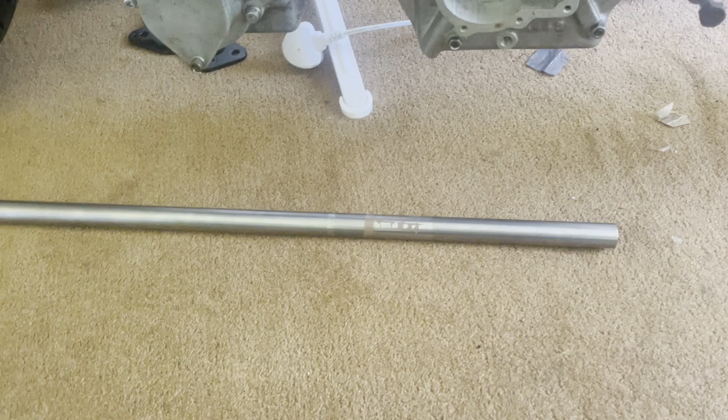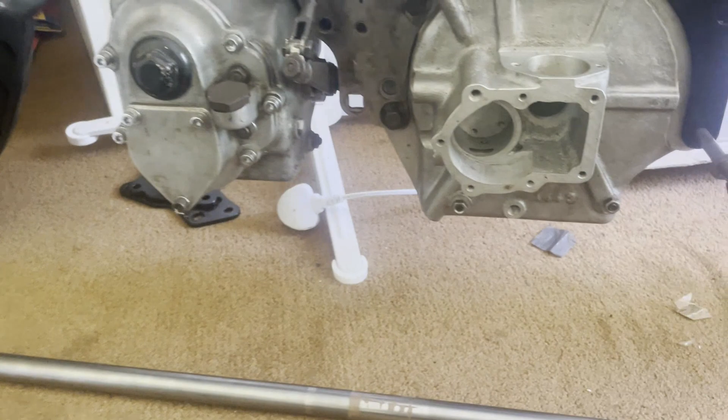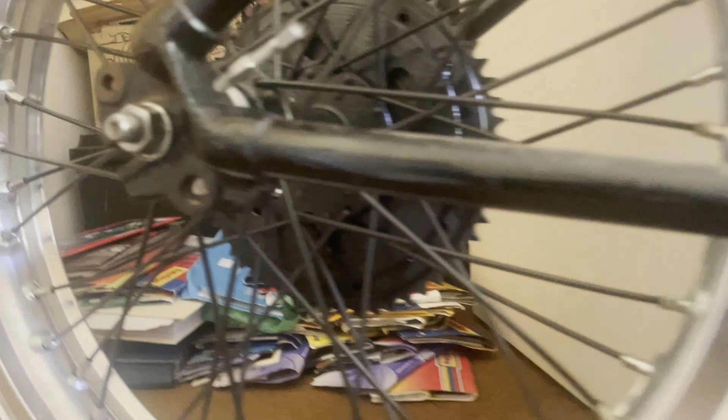So the next part of the project is this steel bar. I've got two of them, but I'm just showing one in the picture. What I'm planning on doing, like a few other people have done, is use this bolt and this bolt to join that up to that fixing, and then brace somewhere between the two.

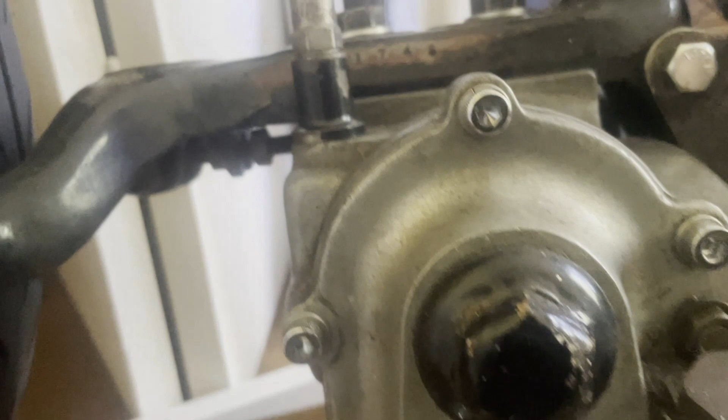So we're going to do something like that with a bend somewhere near the gearbox, and then it's going to come straight and underneath. I'm going to have a go at flattening this tube out so I can drill some holes through it, probably put some lightening holes in. Ultimately these two are at different heights out of the engine, so I'm going to make some spacers so it sits parallel.

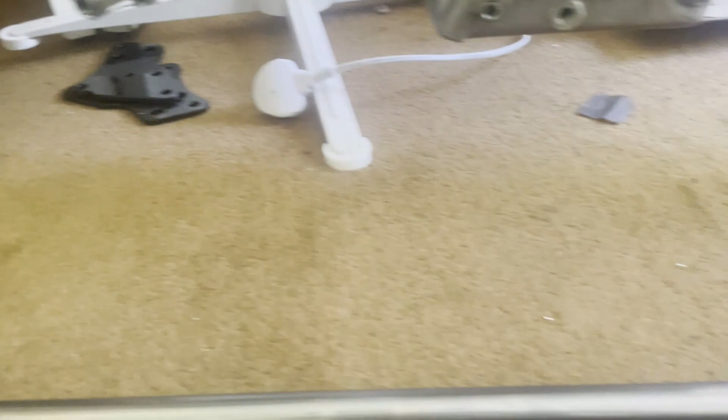And probably maybe put some threaded inserts in as well. But that's the next project. Hopefully this is the last time you're going to see that bit of tube straight and completely round. Let's see how we get on.

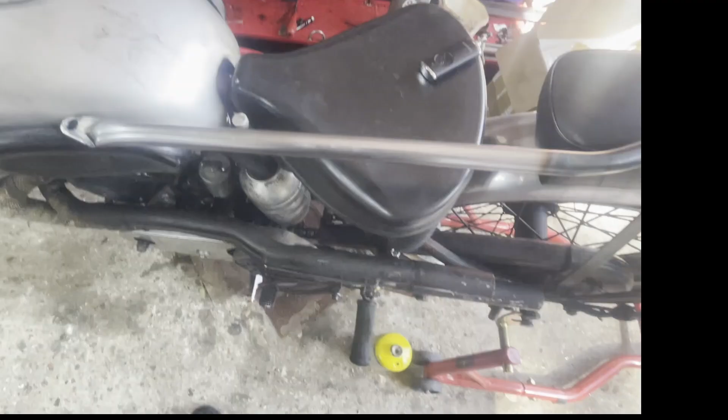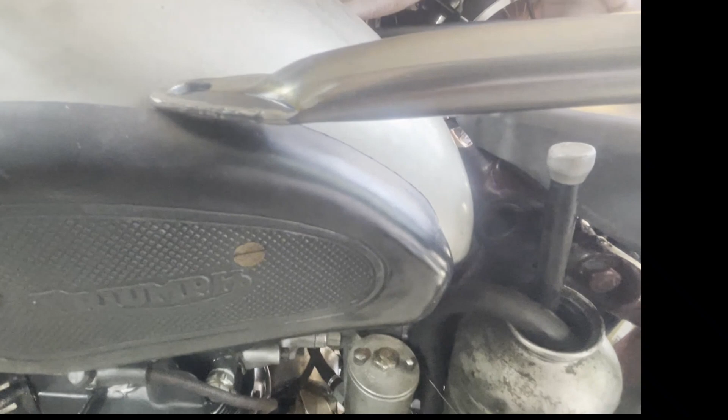So what I've done so far is squash the end of that tube, drilled a hole in it, and then welded it so it's all joined together.

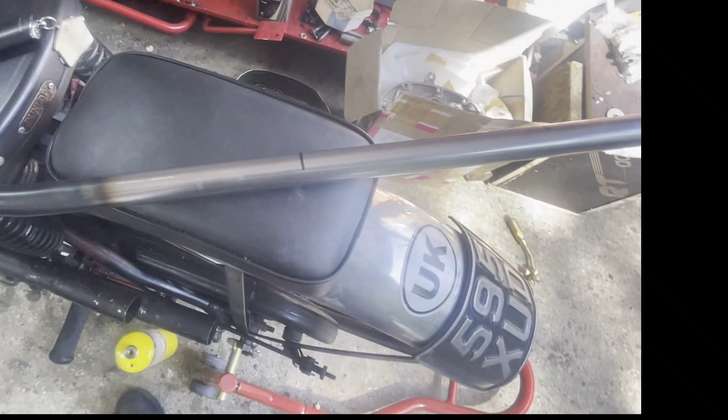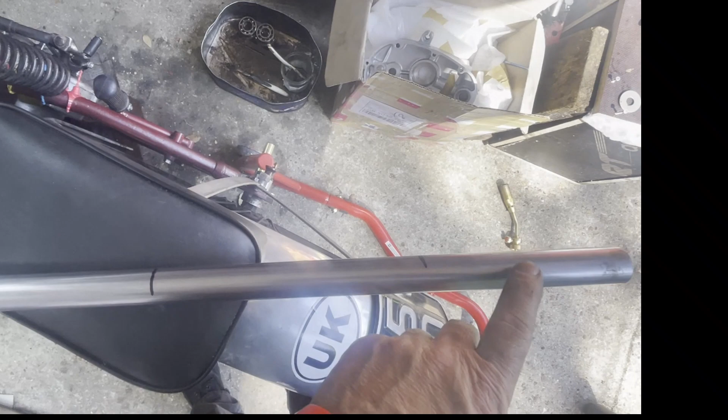I've put a bend which is going underneath the gearbox, if you can remember that bit. I've marked out from there to there, which is going to need to be flattened, and this bit at the end I don't need, so I'm not going to flatten that, I'm going to chop it off.

For this bit I managed to use a friend's hydraulic press, and we used something I'd made previously when I was an apprentice, which I'll show you in a bit, as a way of creating a bit of a radius edge on that. Sorry if you're all getting sick of looking at that.

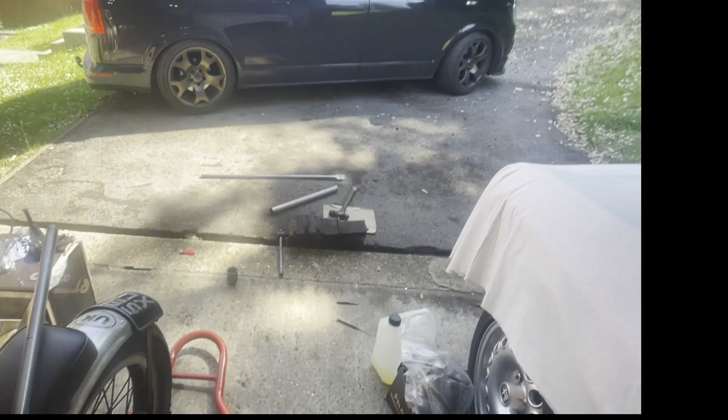I'm now going to mark the end of the other tube out and drill that hole in to get them the same, and then I'll be able to use this one that's made as a pattern to bend the one that's still straight over there at the moment.

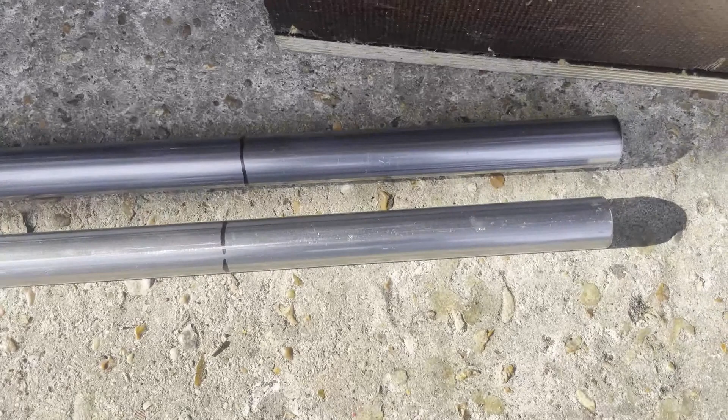Unfortunately I forgot to press the record button when I was bending it. One is a little bit better bent than the other one, I don't know how well you can see that - a bit of a flat in the middle, but effectively two frames bent up. And then the markup is where I need to flatten off that section.

And then we've got another couple of bits and bobs to do, and we'll have made some lower frame stays. There's a few more jobs to do on this particular part of the project, and hopefully it's really coming together.

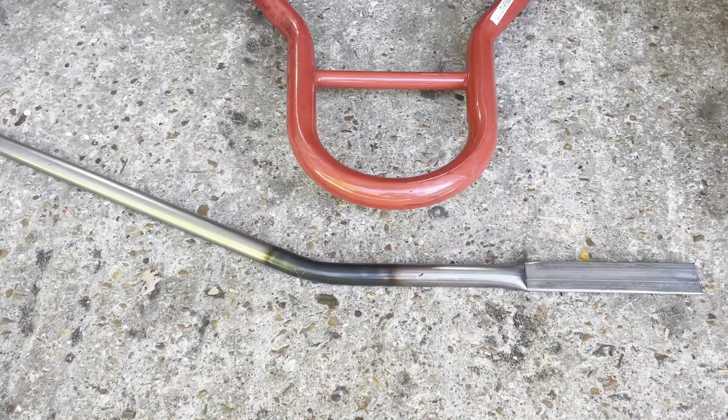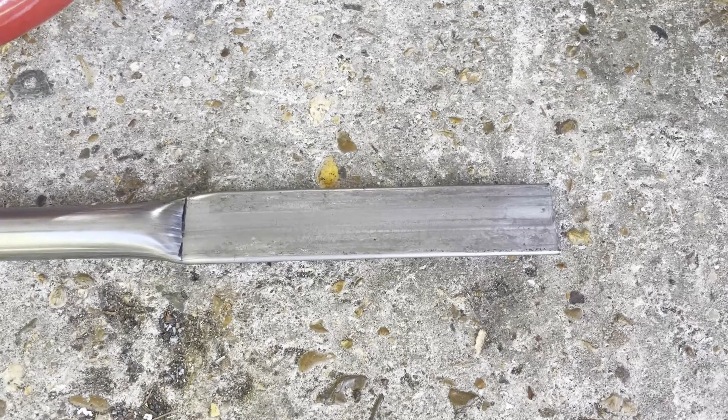Right, so we're back on the Velocette project, and I think I might have promised to show you what I was doing in the way of squashing the end of the tube, but I've failed miserably in that. Basically I used a hydraulic press and some big bits of metal, one below, one above, and I managed to squash that down nice and flat.

So what I've got to do is put a radius on the end. I need to mount it to the bike, fixing it with the bolt hole that's through there, and then I need to make up something so I can push it through the crankcases and mark a hole on either side, because the holes aren't even about that flat section - one's upper and one's lower, and I need to get them exactly right.

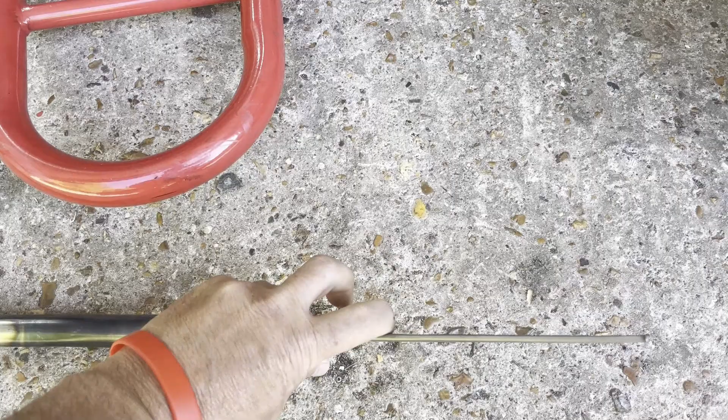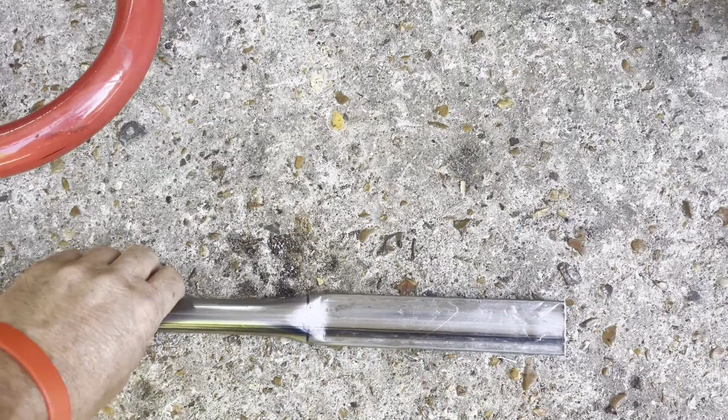So I'm going to go and do that off camera, and then I'll bring you back and I'll cut round the end together. We'll drill some holes, and then effectively I'm going to be making some sleeves which are going to go in here - if you can imagine, the crankcase is sat against that face, and you sleeve this side of the bolt on this side of the hole, to space that off the engine. There's also a countersink or a counter bore on the engine crankcase, so it needs to be like a step top hat, and then I'll decide whether I'm going to weld it to that frame.

Anyway, we're progressing, we're getting there slowly. Let's go mark some holes out and I'll come back.

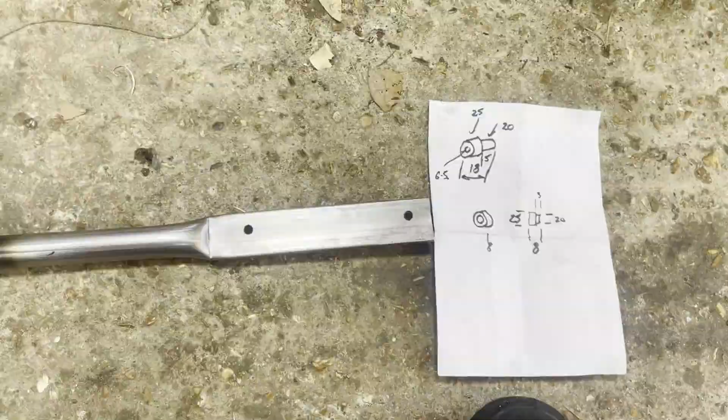Right, so drill the holes. The bolt holes we're using are only 1/4 inch through the crankcase, so that's as big as they're going to get, so it's not going to be the strongest thing in the world.

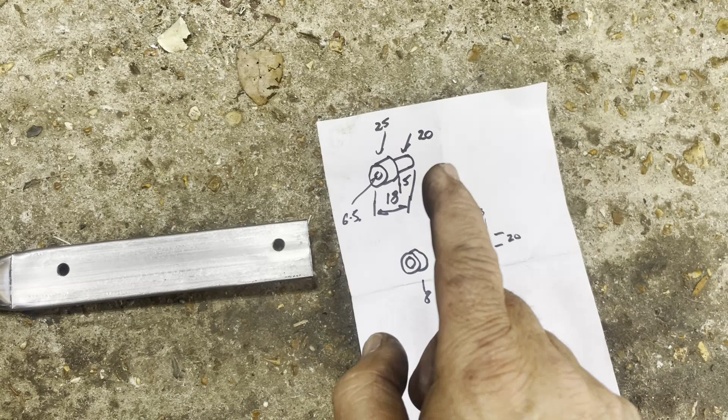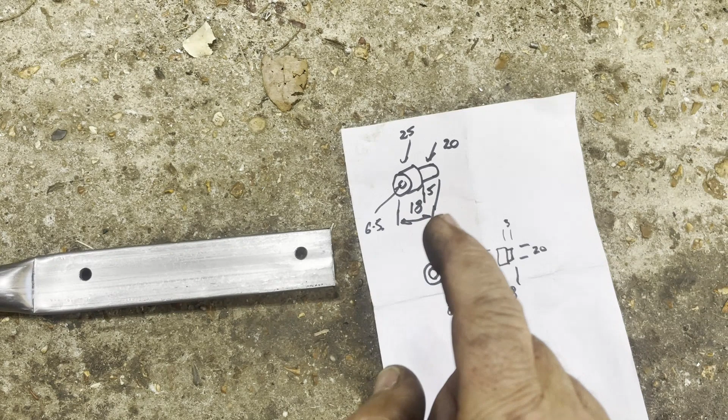But I've measured it up, and I made some very, very rudimentary drawings. My technical drawing teacher at school would have a fit, but anyway, I know what I'm doing. So it's about 25mm OD, and there's a counter bore into the crankcase which is only about 5mm deep on the front. So I need to make two of those.

I'm just trying to decide whether I'm going to make them out of aluminium. Probably will, to keep the weight down.

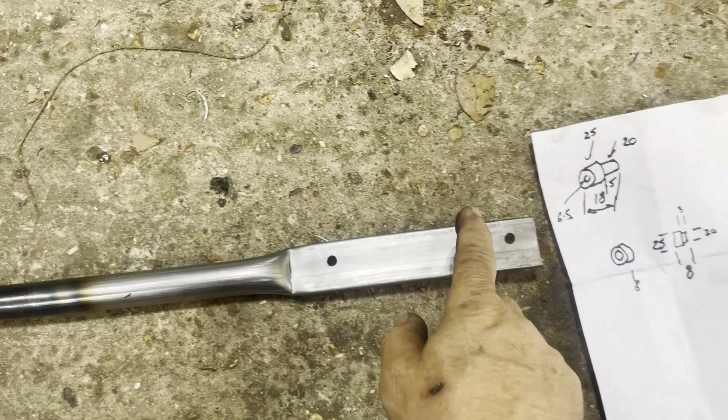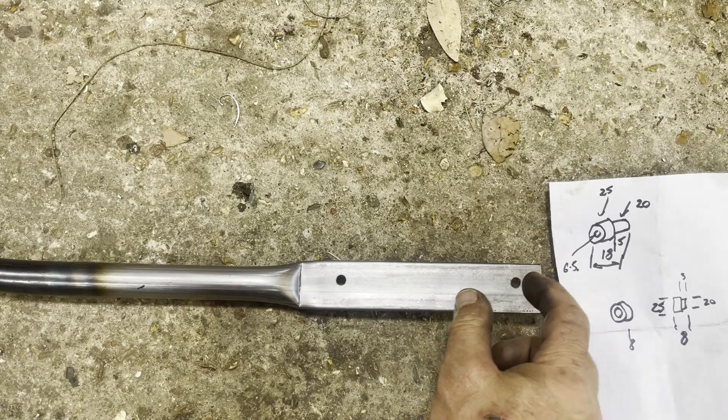And then I'm thinking about, obviously this is all to do with strength. I know I'm not trying to make an iron bridge or anything, but what I'm considering is it would be nice if we made a nut that had a nice flat face on the outside, because a 1/4 inch nut isn't going to really do much to resist the twisting motion, if there is any.

So I'm thinking I've got some hex bar left over from making the nuts for the spindle. Could maybe make a nice big nut with the 1/4 inch thread in it.

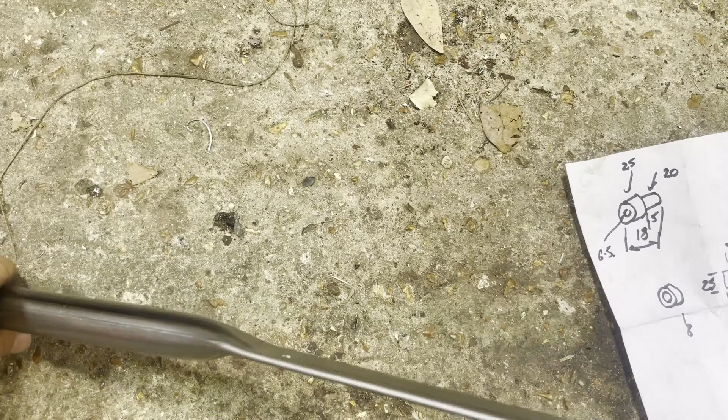And the other thing I'm thinking about is this tube I've bent. Again, I looked at lots of different ways of making this, and this is the way I chose to make it. So I'll put it down and talk and point at the same time. This is quite strong now because it's like 2 pieces of material thick, and I'm going to weld up the end. But the weak point is through this actual bend.

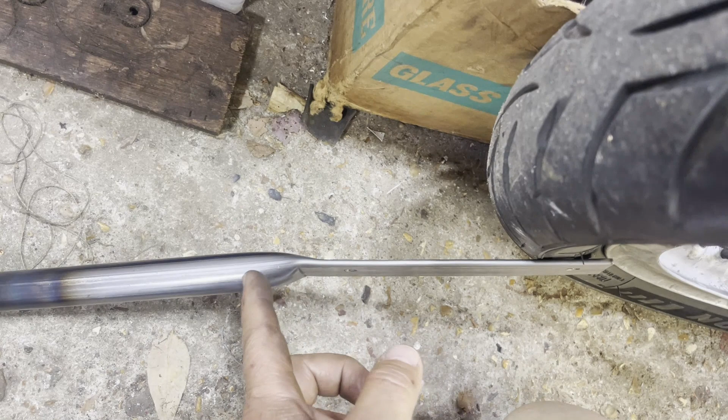Or I think it's the weak point. So I'm thinking about cutting a triangle and making a gusset that would fit over the top, just to stop it bending this way. I don't know if I really need to do that, but it would make me happier having pushed it about with a vice.

You can see I've pulled that now, so it's not square with the tube. It's actually tweaked in, and what I've done is I've also done the opposite on the other end.

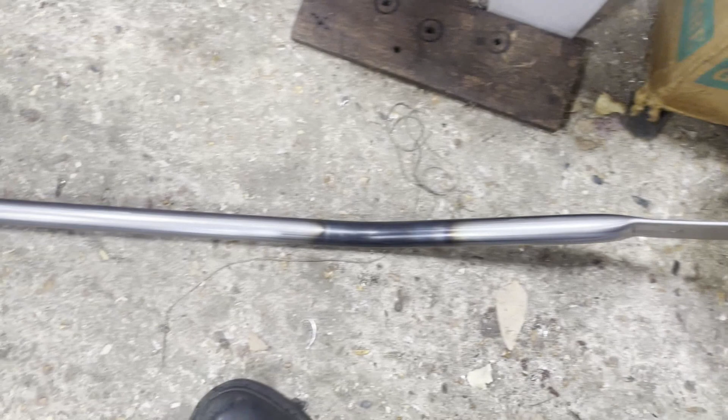The idea is that the two places which I'm trying to join together aren't in line with each other, basically. So the frame needs to come from the back of the bike, come in, and then come this way onto the crankcase. Anyway, it'll become more apparent when I finally get this done and I show you it mounted to the bike, but that's where we've got to so far.

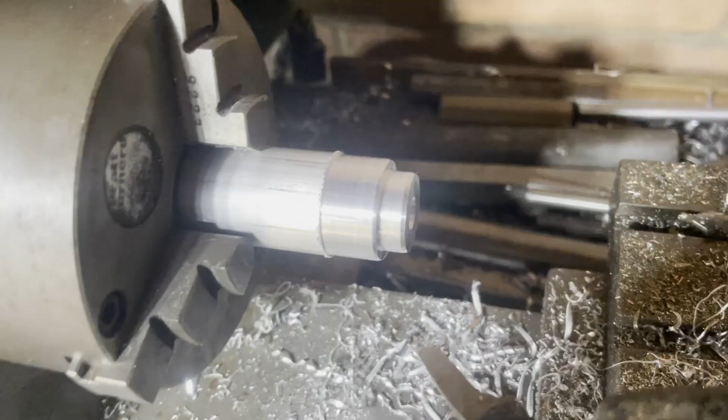So I've just been turning up the first of the spacers. We've got a 6.5mm hole, just a little bigger than 1/4 inch. And obviously there's the step, so I just need to part that off, and then I need to make 2 of them.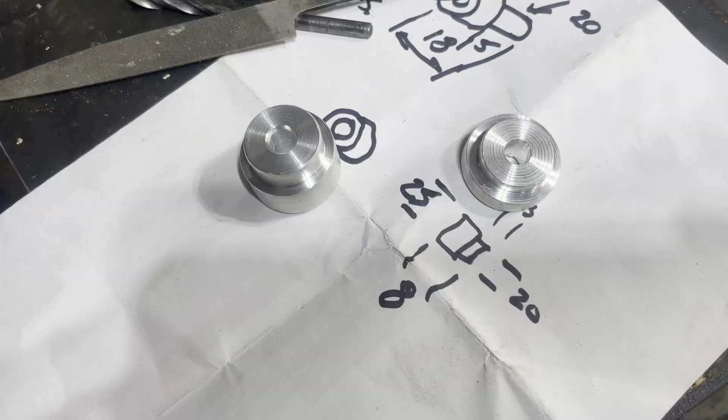So hopefully, if the drawing didn't make any sense, the part will. What I've done is I've just made one set for one side at the moment.

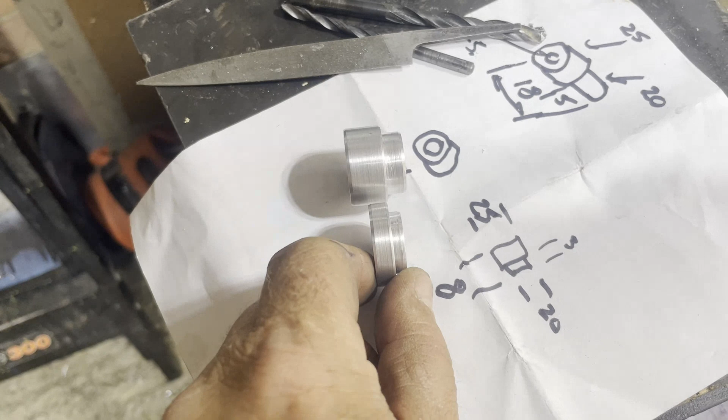That's the sort of difference between the counter bores on the crankcases. So hopefully I've got it about right, but there's a little bit of material I can take off one or the other just to get them perfect.

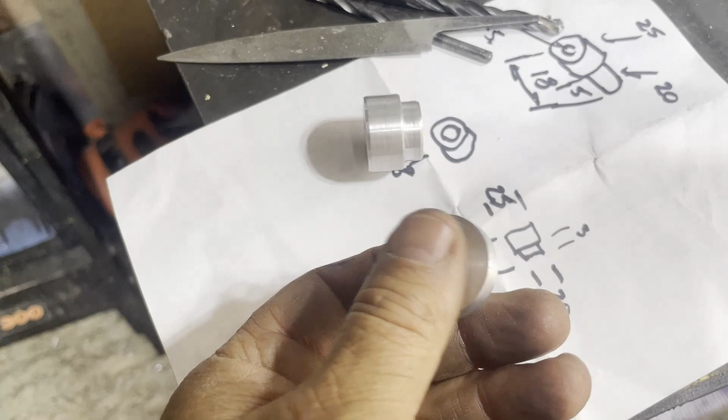If it needs modifying, it's quite difficult to get the vernier in to measure the space for this one. But yeah, let's go and try it and see how we get on.

So just so you can get a picture of what we're doing, those 2 bolts are what we're going to be bolting onto with the frame. That's obviously one of my spacers.

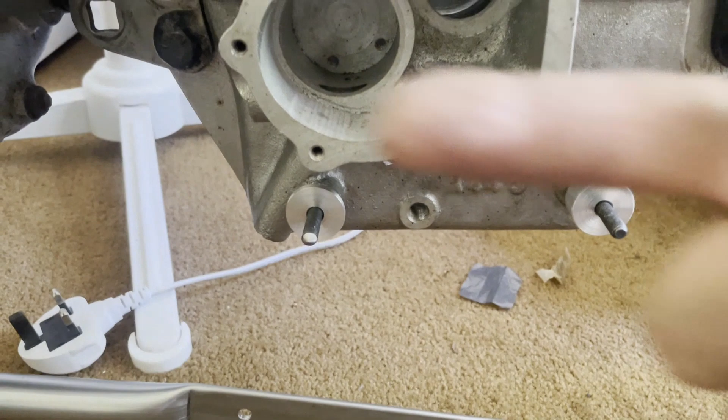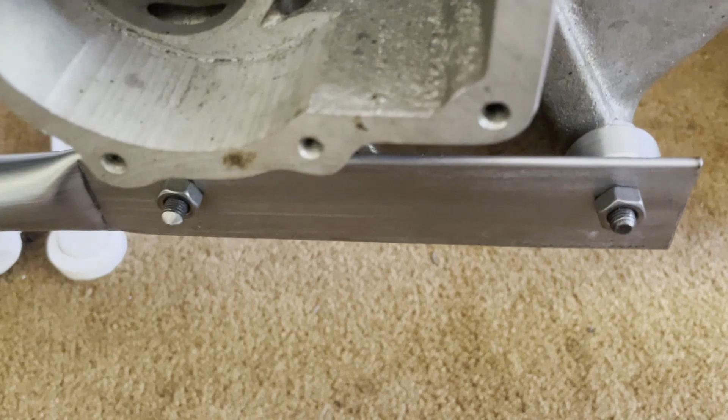That's another one, and I'm going to put the frame on, hopefully they'll be parallel along that line at the same distance in or out. Let me do that, because I haven't got 3 pairs of hands, and I'll come back. And there it is. A lot of faffing about for not very much, but

It's all those details that make all the difference. So I don't know if you can see, I've got a point on that bolt. That was what I used to push through the crankcases to bash onto this to give me the mark, so I got the holes. I've got to be honest, that was absolutely perfect, like a transfer punch.

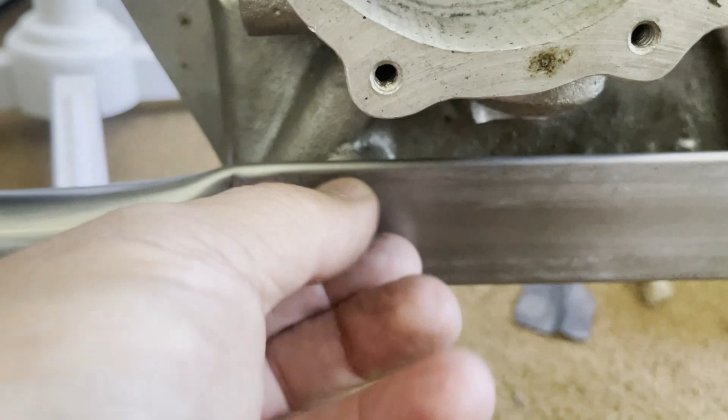So what I was saying about the hex bar, I don't really want to be just pulling up this on that little nut. I'm going to make a bigger nut with, maybe it's only going to have a small thread, so clearly we're not going to be able to lean on it and go nuts, but I think it will be a way of spreading that and resisting any twisting.

So what's left to do, I've got to clean that nose piece up, and then I'll weld that so it's all together. I might add some lightening holes, and I might also weld them, which will hopefully add a bit of strength. Not that it necessarily needs a bit of strength, and to be honest, it's probably going to be a styling thing more than anything else, but quite fancy doing that. And then, like I was saying before, maybe add a gusset over the top or underneath, or both, just to strengthen up that little area there.

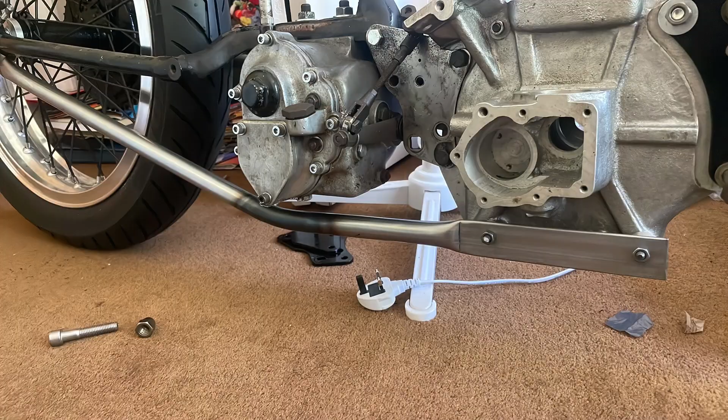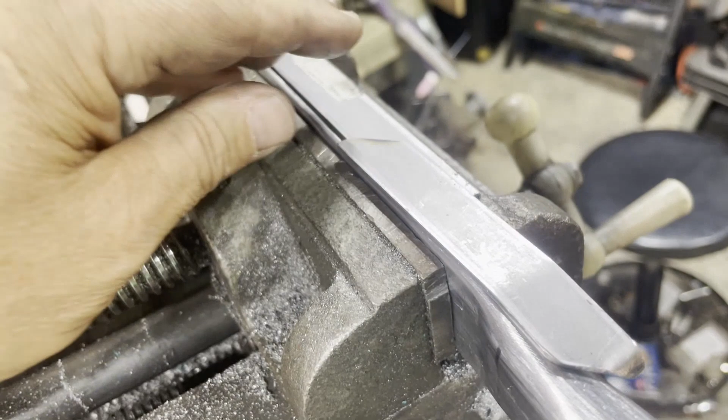So, gusset time. So I folded that up and cut it up, and then cut some angles on it, and then what it's going to look like, if you can see, I've just sort of jury rigged that up for the moment, but it's going to get welded along here, and I've got a little step just there. Hopefully I'll be able to also stick a bead of weld on that. So that's the plan, to give it a little bit of strength.

So I'm going to catch some dirt and puddle some oil in, I guess, but yeah, that's what I've come up with. All I've got to do now is work out how I'm going to hold it while I weld it. So I'll bring you back after I've welded it on, and we'll see what sort of job I can make of that.

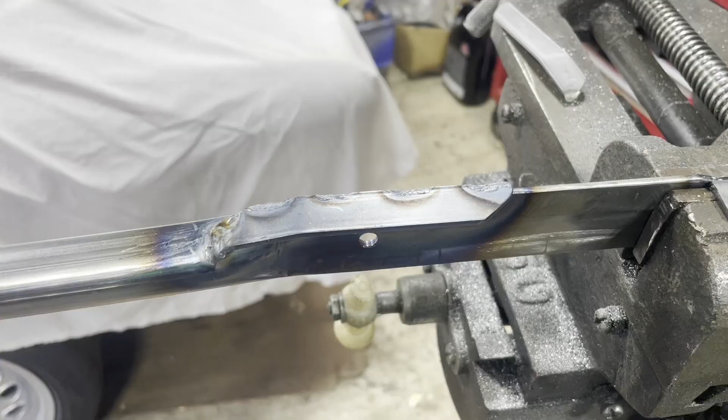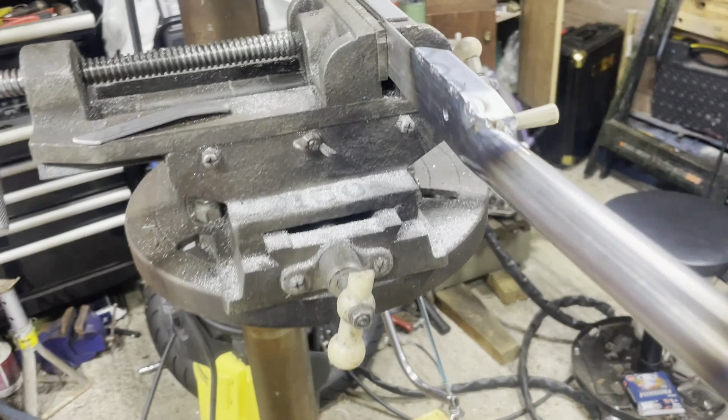So it's welded on. If you can imagine, this is upside down now, so we're looking at the bottom. And tied it in across to resist it that way. I've got some long tacks down there. So I did wonder about seam welding it all the way along, but I don't think it's really going to make a lot of difference.

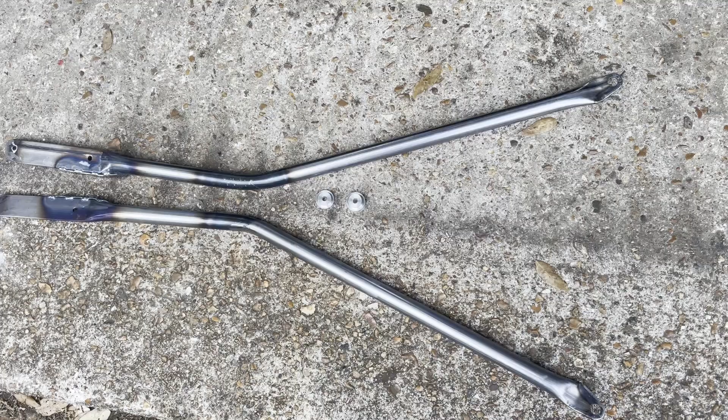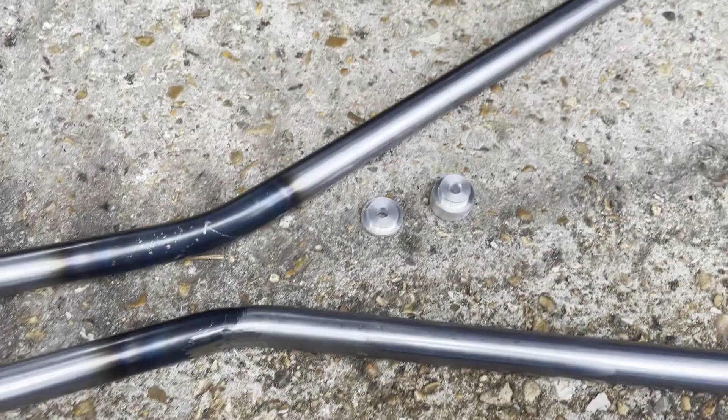So, one down, one to go. And then there were 2. So, gusset's welded on. I've only got 2 of the spacers, but you've seen them before.

So, last thing, you're going to need to join this one to this one when they're at the right angle. I don't know if that's going to get it into this video or whether that's going to be another one. And to be fair, what I really need to do now is bolt all this up solid, and then I can mitre the ends of the tube and make a really nice job. And it really wants to be welded on the bike, ideally, would be the perfect scenario. So I need to get some proper bolts for the end, buy something or make something. I've still got to make the hex nuts or some spacers or something, whatever I'm going to do there to sort of stiffen that up a bit.

Yeah, well, I've got to say I'm pretty happy. Hopefully you guys are happy.